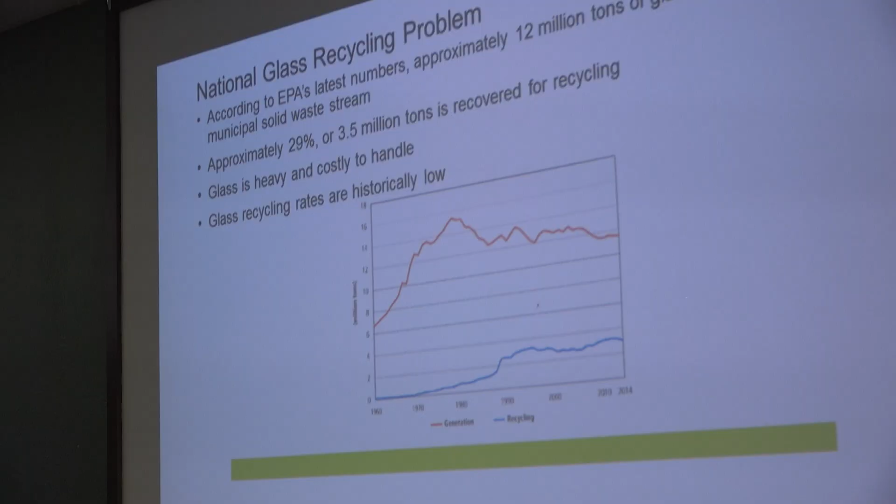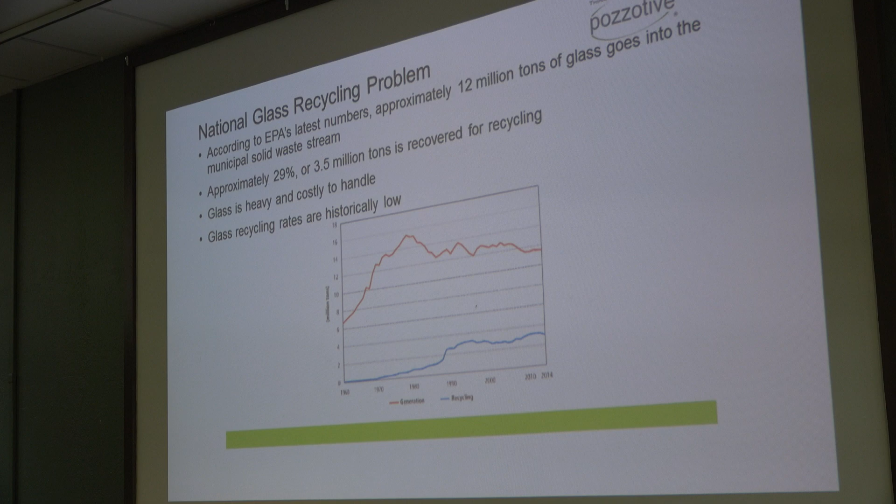We've done jobs with such engineering companies as AECOM for the 2nd Avenue Subway. All of the concrete block of the 2nd Avenue Subway has the glass pozzolan in it. Okay. So we go to talk about glass recycling. It's a major problem throughout the United States, and it's costing municipalities a tremendous amount of money to handle the glass, as you all know.

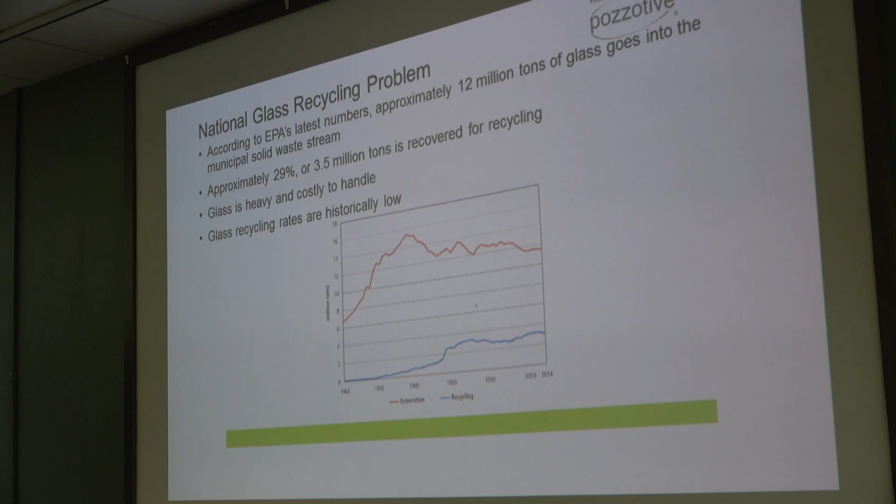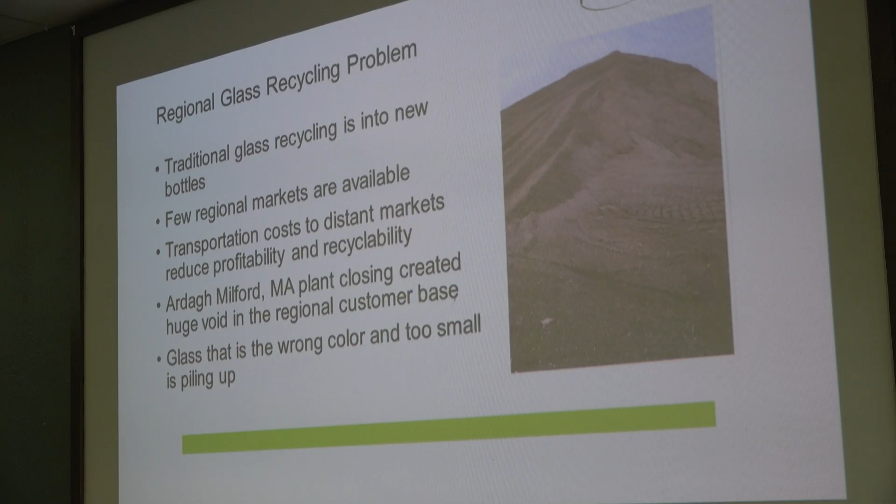We figured this out. This is just a graph that shows the amount of glass that is actually recycled. Traditionally, not MRF glass, but bottle redemption glass has been used to make new glass bottles. And MRF glass has really not been used. Everyone thinks that it gets recycled, but it really, unfortunately, doesn't, because it doesn't have that end market.

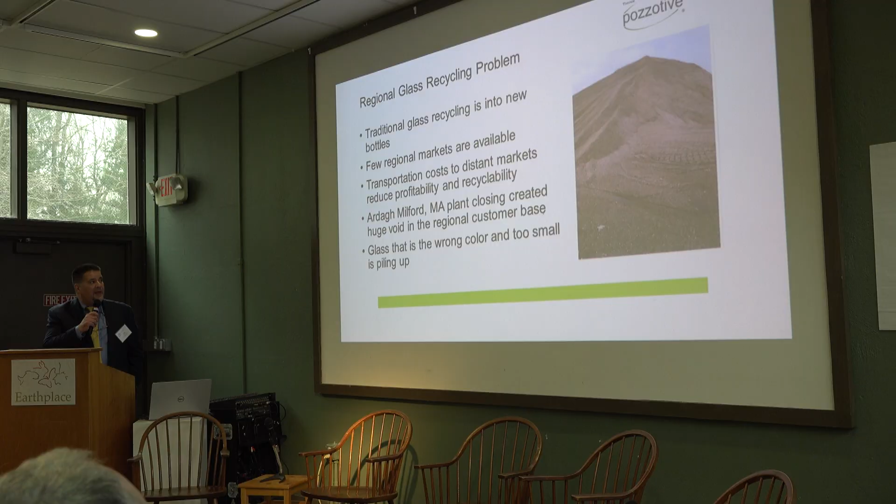We have filled that void because the state of New York uses about 3 million tons of Portland cement a year to make concrete. The City of New York uses about 2 million tons. We could replace up to 40% of the cement in concrete. And think about that, a significant amount of glass that could be used. The plant that we're planning on developing here in Connecticut is starting out to be a 50,000 ton plant with the hopes that it'll grow to a 100,000 ton plant.

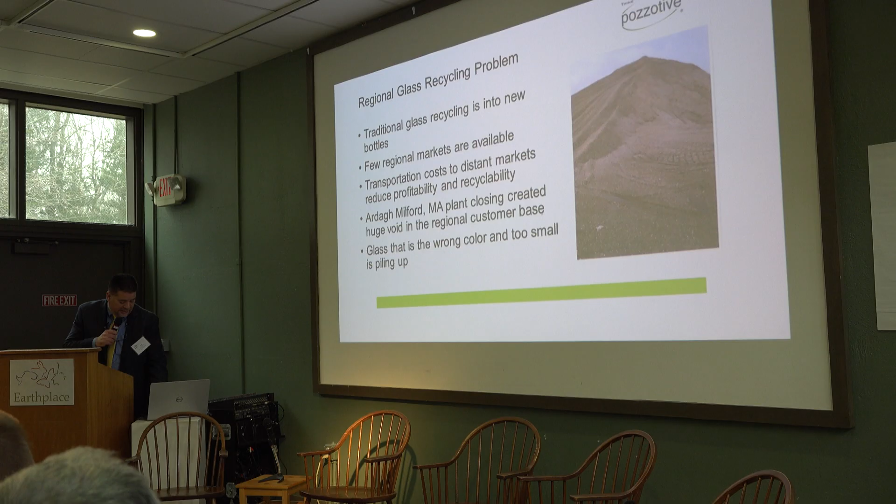So we think about glass and all of the contamination that is found in glass. We could process up to 20% non-glass contaminant in the stream coming into our manufacturing plant. We're not recyclers. We're manufacturers of an actual product, and that product is made under very high standards and quality controls.

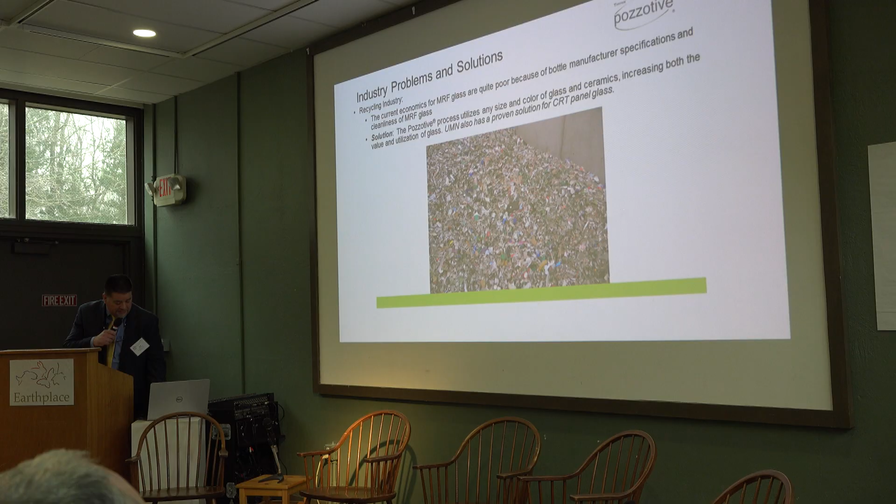We have also developed an opportunity for CRT panel glass. CRT panel glass is the non-leaded portion of a cathode ray tube, and through years of really hard work, we've created an opportunity for that. And we just finished up a long-term study with Rochester Institute of Technology, and the Staples Business sponsored a program that showcases the testing that was all done, third or fourth party testing on that. So we're really excited about that.

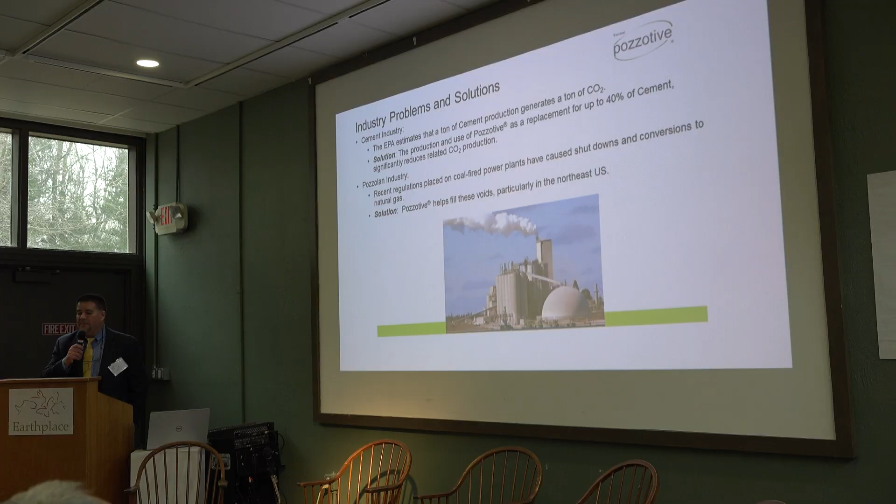And we think about cement in itself. Pozzotive actually reduces the carbon footprint of the concrete by reducing the amount of cement. For every ton of Portland cement that's manufactured in the United States, and actually globally, about a ton of CO2 gas emissions occur. So it's a pound-for-pound equation. A pound of mass generates a pound of gas. So in the end, by reducing the amount of cement that's used in concrete, we're actually drastically reducing the amount of carbon emissions and greenhouse gas emissions that are emitted into the atmosphere.

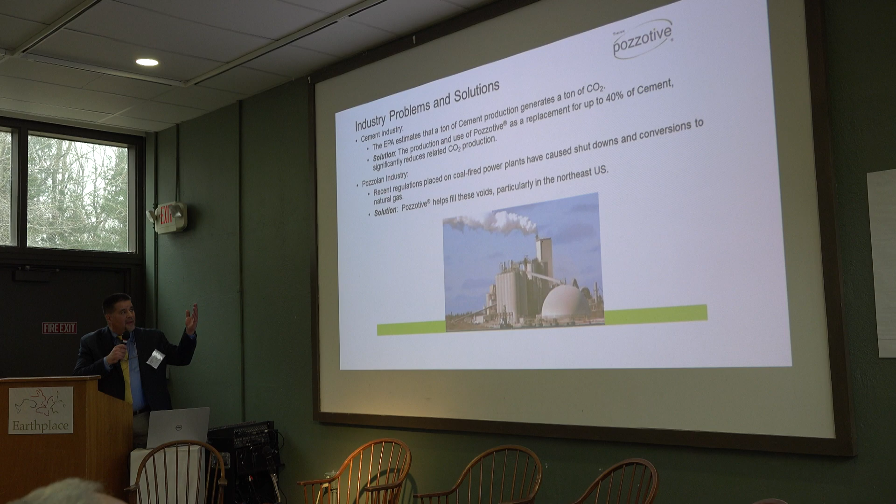And this is proven. City College of New York and the Durst Organization sponsored an amazing in-depth study of glass that Pozzotive is the focus of. And it's long-term testing, 2,000 freeze-thaw cycle testing, linear shrinkage, compressive strength, modulus of elasticity, so many great benefits that glass offers to concrete. So we're excited, and for sure, this is going to be a great opportunity for the folks in giving a regional answer to glass. Some of the buildings that are actually built with glass pozzolan.

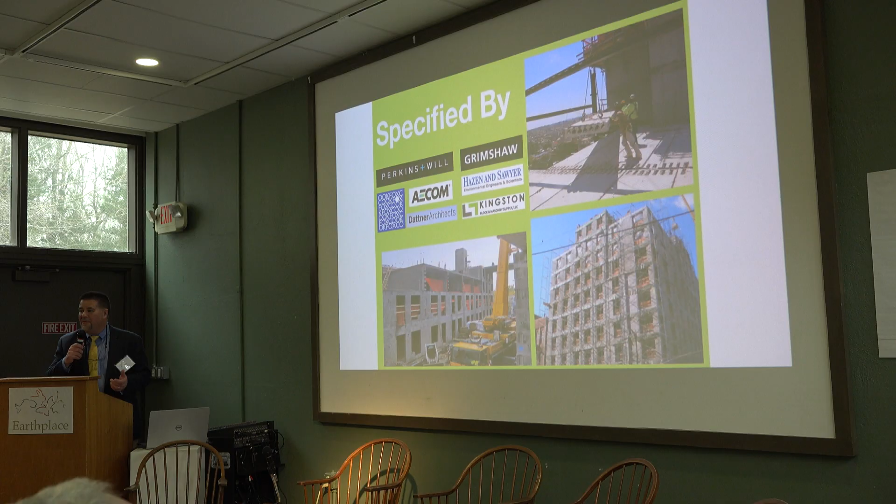Went into pre-stressed concrete hollow core plank, high-strength concrete block, poured-in-place concrete, and we work with some of the largest engineering firms in the country. And we're really excited about the 2nd Avenue subway. Every concrete block in the 2nd Avenue subway has about 1.5 pounds of pozzolan in it. And there's about 1,300,000 8-inch equivalents in that system. So it's really a great example for the material and how it's used.

But now we're working with a company called O&G Industries in Connecticut. And this actually represents a perfect circular example for the use of glass, MRF glass. Like has been said earlier, it's only good if you use it. Unless it actually is being used and brought back into the marketplace, it's not really recycled.

So what we do is we manufacture the pozzolan. We don't harvest. The recyclers bring us the MRF glass. We process that MRF glass into a pozzolan that goes to the concrete manufacturers like an O&G. And they then take that material and bring it back to the urban center from which that recyclable was derived. So that truly is a perfect example of recycling and a perfect opportunity for the circular economy.

One quick example of that too is we took the UN glass, the window glass out of the United Nations. We backhauled it on our concrete block trucks. We processed it into the pozzolan and went back to the UN in the form of a permeable paver made by the Unilock Paver Company. So that was done a couple of years back. But a big deal, and it truly is.

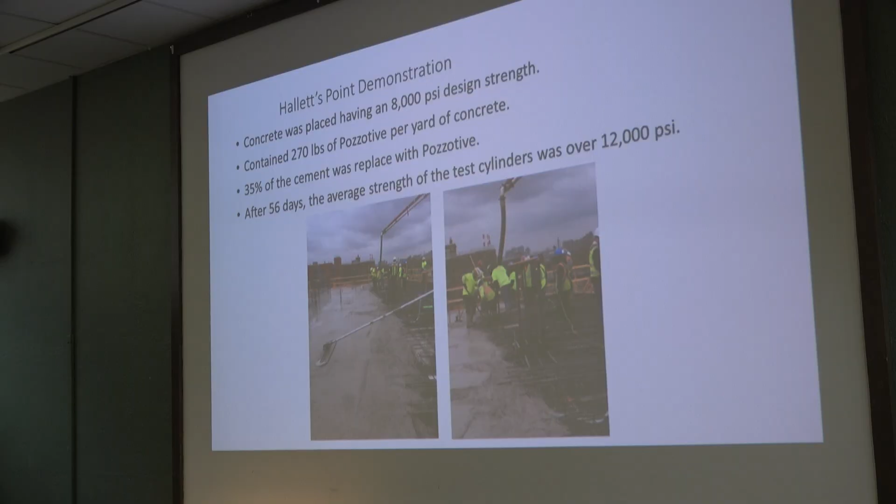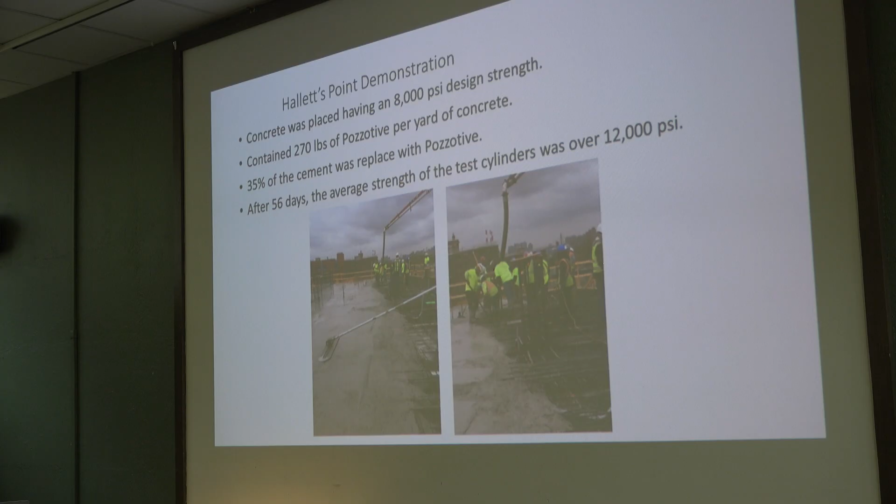This is an example of a recent opportunity that we had with the Durst organization. We did this field test for pumpability of the concrete. No issues. Wonderful opportunity. Increased compressive strength on the actual mix design, and that's my forte. I'm not a public speaker per se, but my forte is concrete and cement. So very boring, unsexy topic, but glass is really a cool thing.

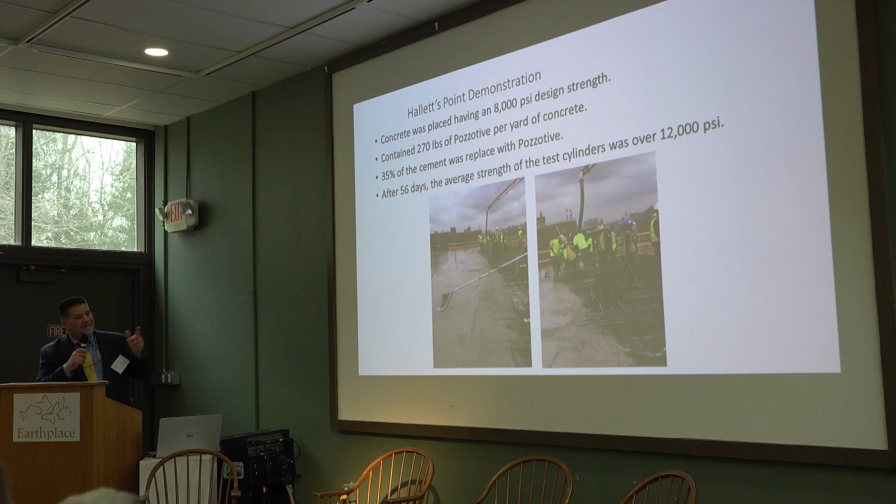It's really caught my passion over the past 20 years. I've been so fortunate to be mentored by one of the founders of the U.S. Green Building Council, Robert Fox, from Cook Fox Architects. And he actually put me on this journey 20 years ago. So I can tell you that story, but I only have 15 minutes, otherwise I'm going to get the hook, as I've been told. So I could speak about this for literally hours.

So, just going back to show some of the studies that were done. And we're so excited about this because this reflects the ability for concrete that's batched with pozzolan to actually reduce chloride penetration. The thing to know about that is that here in the Northeast we use a lot of salt, road salt. And you think about bridge decks, sidewalks and such. And then you think about the embedded structural steel in that concrete.

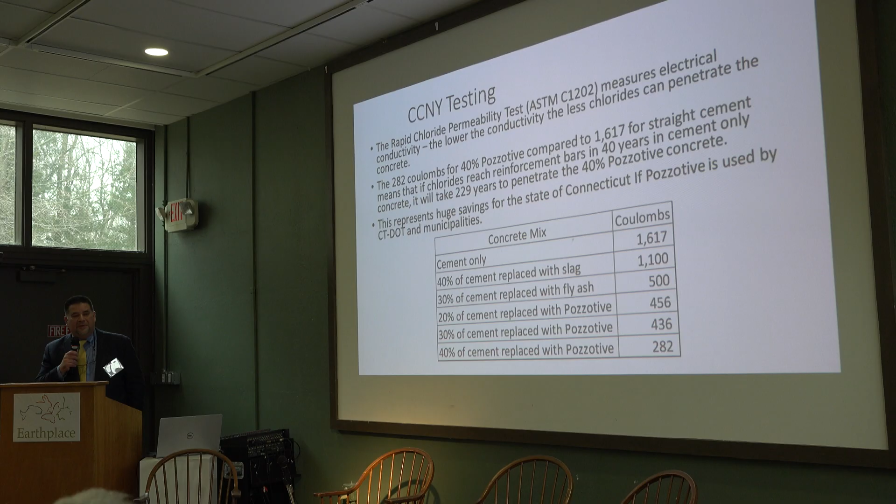It gets corroded because the chlorides penetrate through the concrete and corrode the structural steel, which reduces the life cycle of that concrete. The good news about pozzolan is it actually stops that chloride from penetrating dramatically.

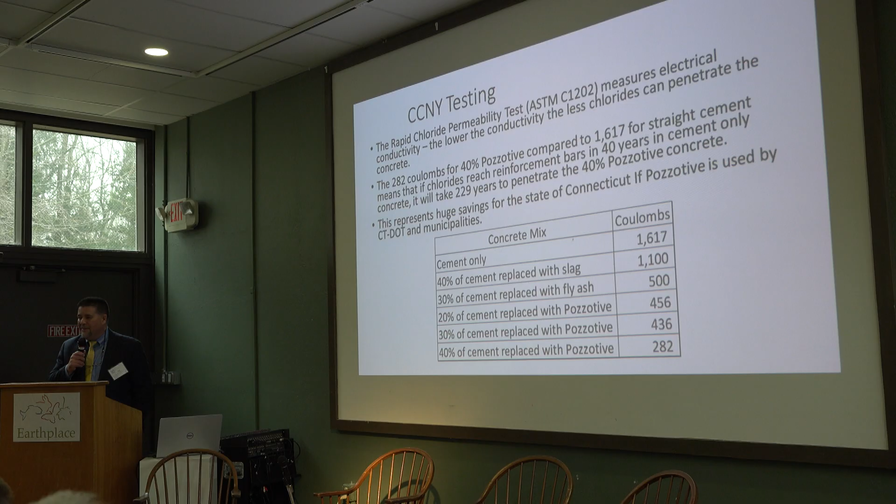Oh, that was a sign. I got 5 minutes. Okay.

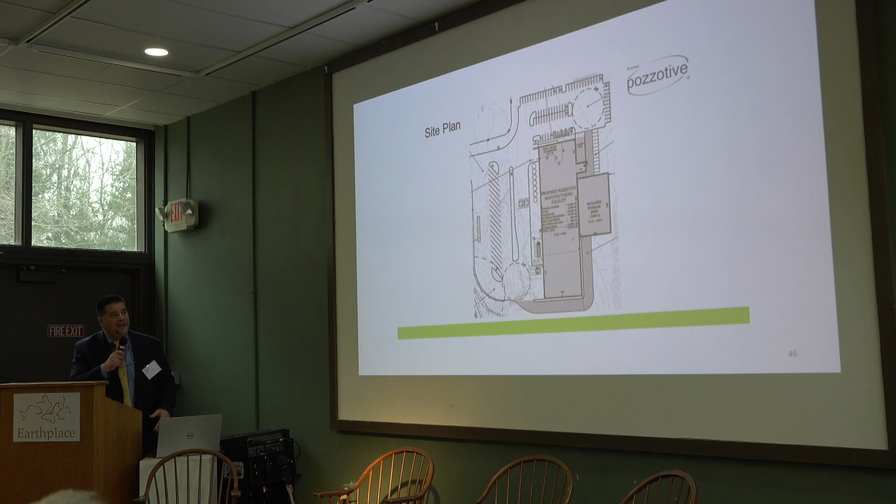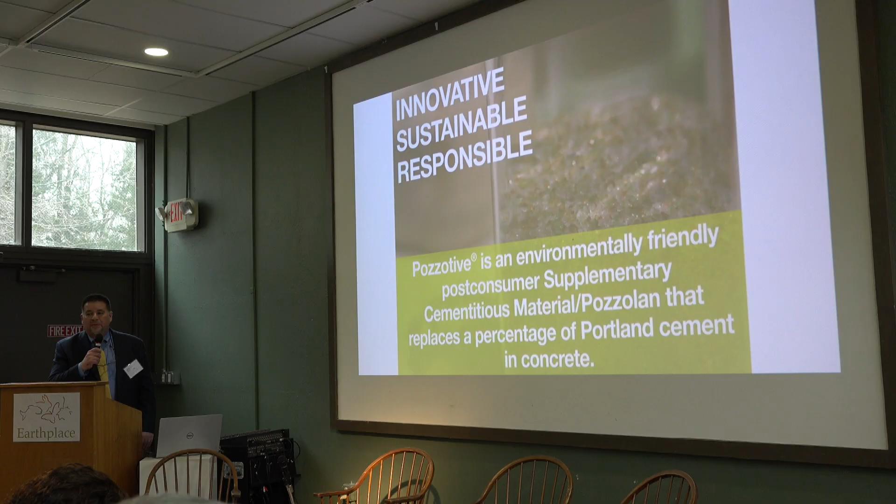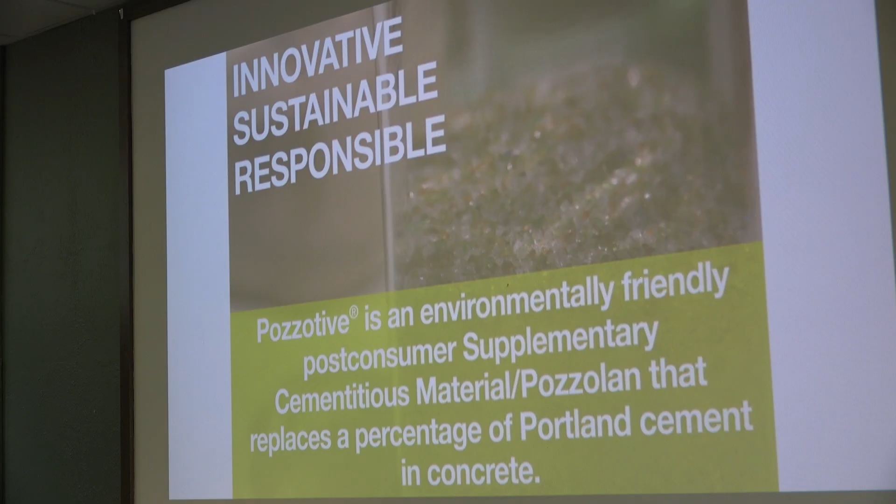This is a site plan of a Pozzotive plant. That would be a typical Pozzotive plant. It's a manufacturing facility. It's not a recycling facility. And very high standards of quality control go on in that. And basically, it's truly an opportunity to create a circular example for the state of Connecticut and the Northeast, especially given all of the stresses in the glass recycling industry with the Ardagh Group glass bottle plant closing in Milford.